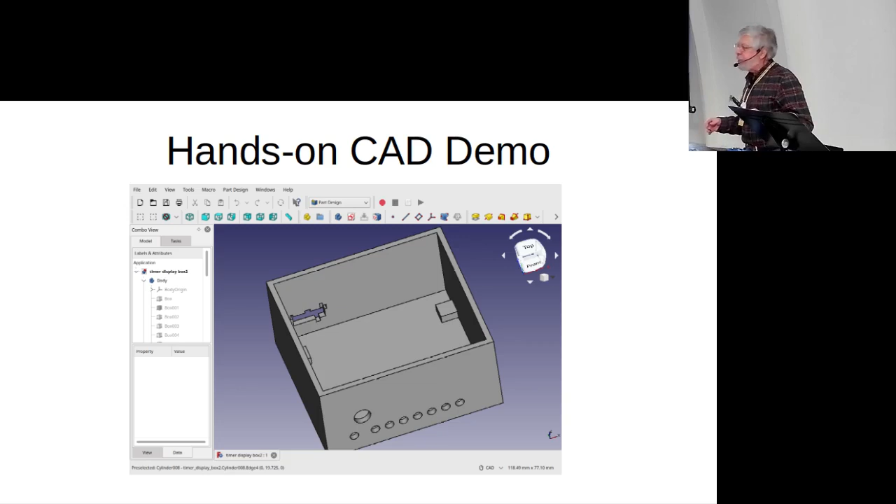So, hams build things, right? This is what we do. We build things. What I'm going to do tonight, live dangerously, I'm going to do a live demo. I'm going to cover a little bit of the history of what we've been doing, as this is normal stuff for us, look at maybe another way of doing stuff, and then actually go in and do it live.

Historically, who knows what an Altoids tin is? How many have built this stuff in an Altoids tin? Ammo box? How many have spent hours walking the aisles of Home Depot with pieces of PVC pipe on your fingers, trying to figure out which ones go where? We use copper pipe, we use PVC. PVC is the universal building material, right?

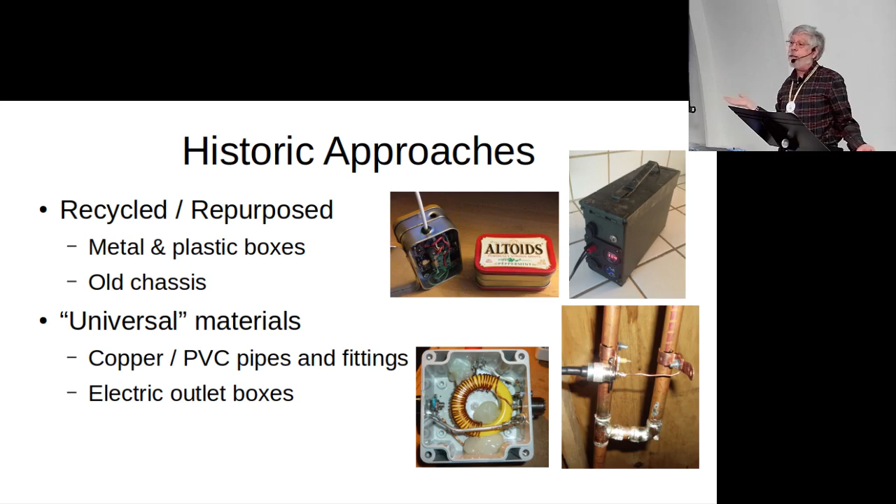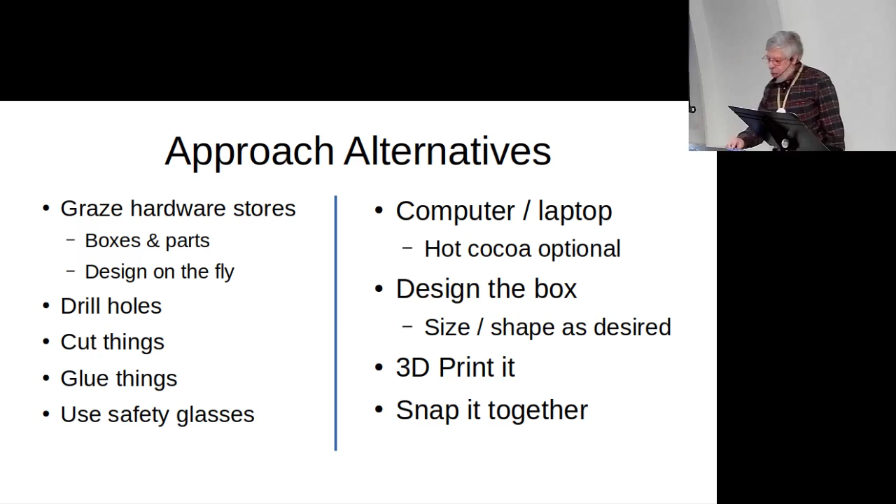Who would have known? But what happens when you have a project like this? What do you build? What do you find for a box for that? And we graze the aisles, we look for things. One approach, so this was Greg's...

What is this? Oh, offset attenuator. One approach is to design the circuit board to fit the box. The other approach is to build the box to fit the circuit board. So we're going to do that this time.

What I did, this was my presentation from about a year and a half ago, or a year ago. I did my solar system. It's got a Victron charge controller in it, but there's no display. And so I designed a display circuit, and I built a box for it.

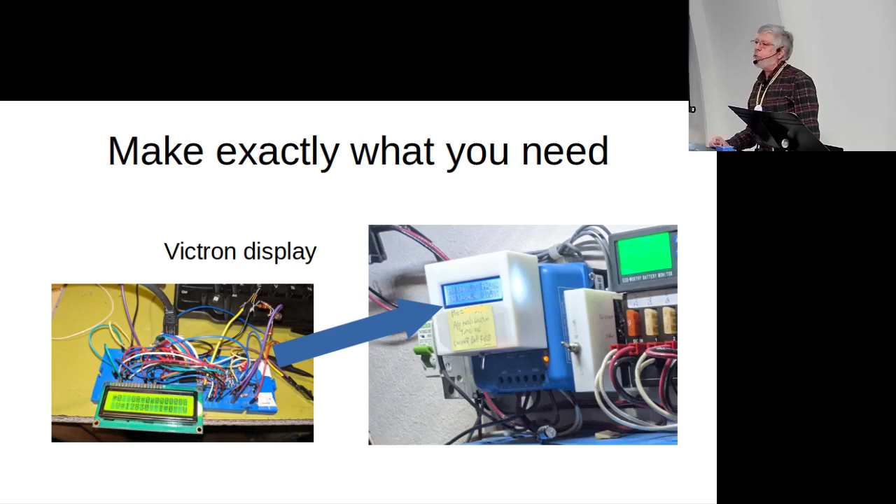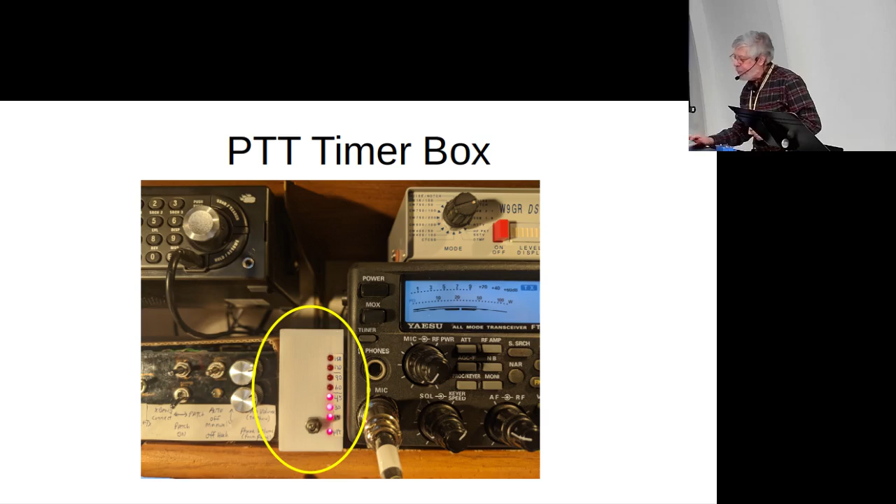You heard me on the coffee break net, I never time out on the repeater, and this is why. I have a little box with a little display. It increments up. When it gets to the top, I'm going to stop talking because I'm going to time out at 3 minutes. So what we're going to do tonight is I'm going to show you how to build that box, live.

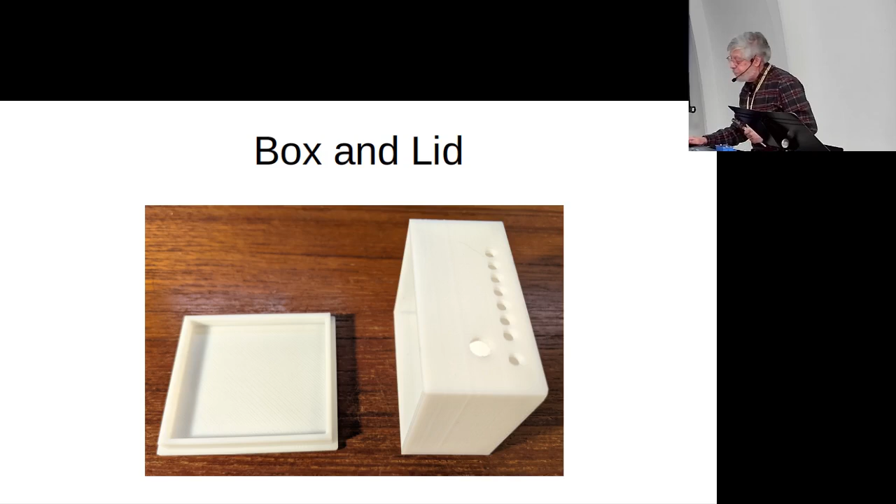There's the box and the lid. That was a test print. Inside: Arduino, some LEDs, stuff like that.

You basically have a box. There are little standoffs at the bottom for mounting the circuit board, holes for the LEDs. Stuff that you would sit there with a drill and safety glasses drilling holes in that thing from Home Depot, or you can have them pre-punched in the box that you print.

The lid snaps right on top. No screwing or soldering required.

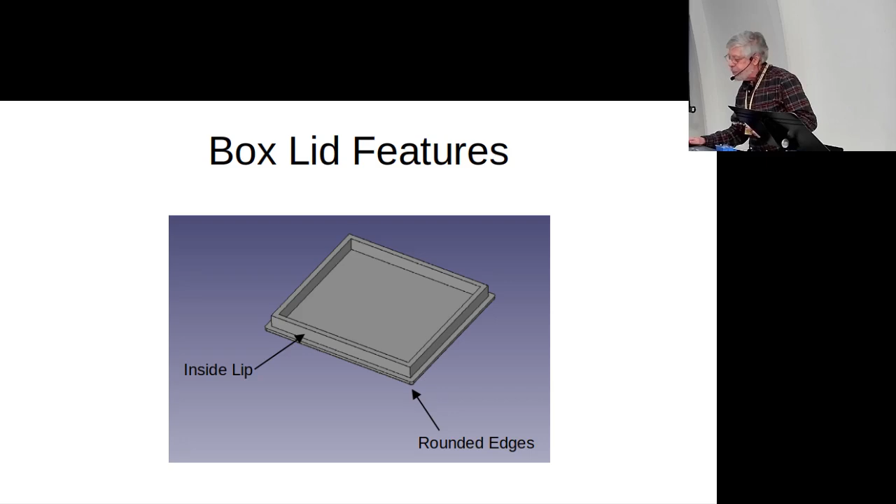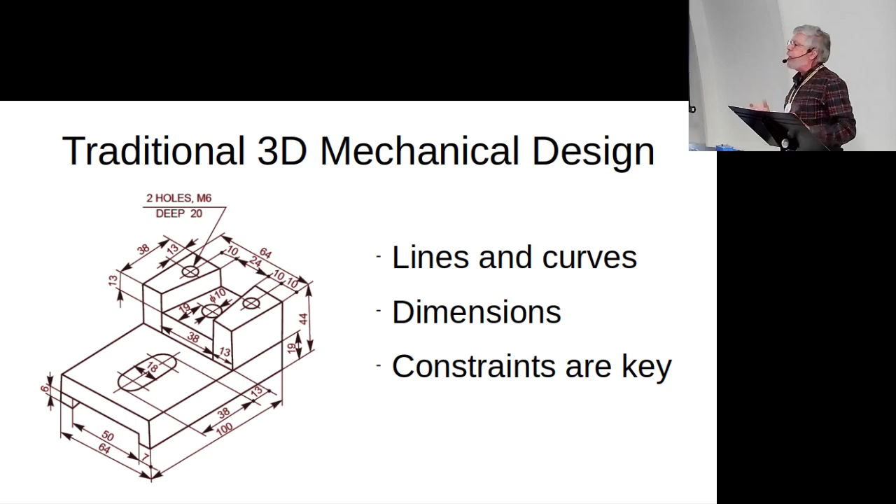3D mechanical drawing. Everybody has this image of 3D CAD, right? You see the picture of the jet engine and all the numbers and arrows and pieces, and they rotate it in 3 dimensions, you can see the thing spin. That's mechanical design. There's another way of doing mechanical design, which is very simple: you put in material and you put in negative material. It's called a hole.

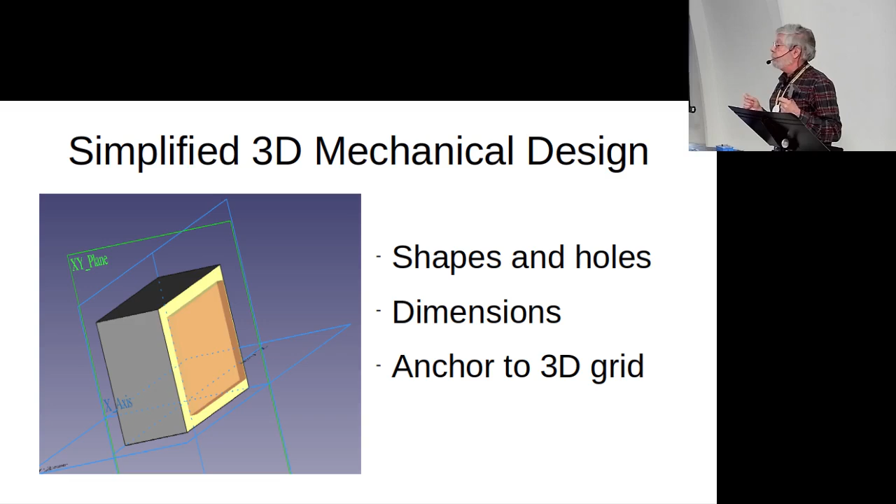And you stick them together and you just build it up from there. And that's what we're going to do tonight. So there's the hole being positioned, and there's the hole when it comes in there.

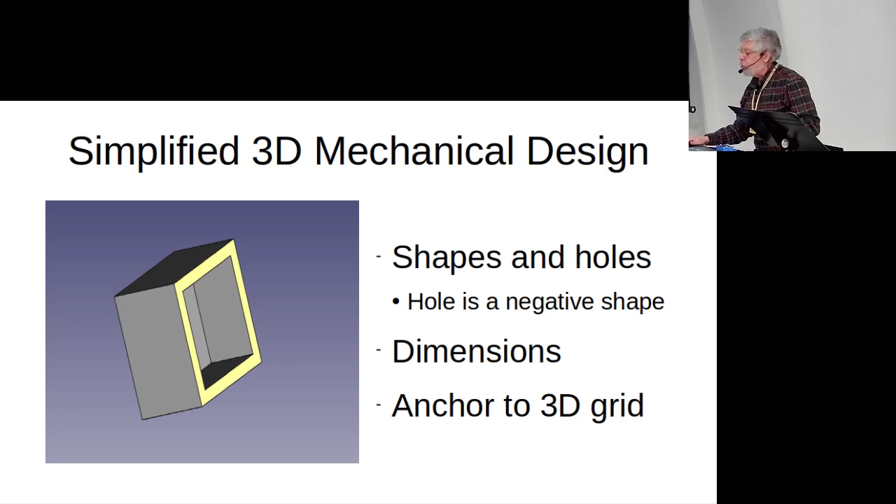All we need to do this is pencil and paper, one of these. This is a digital caliper, amazing device, and some free software.

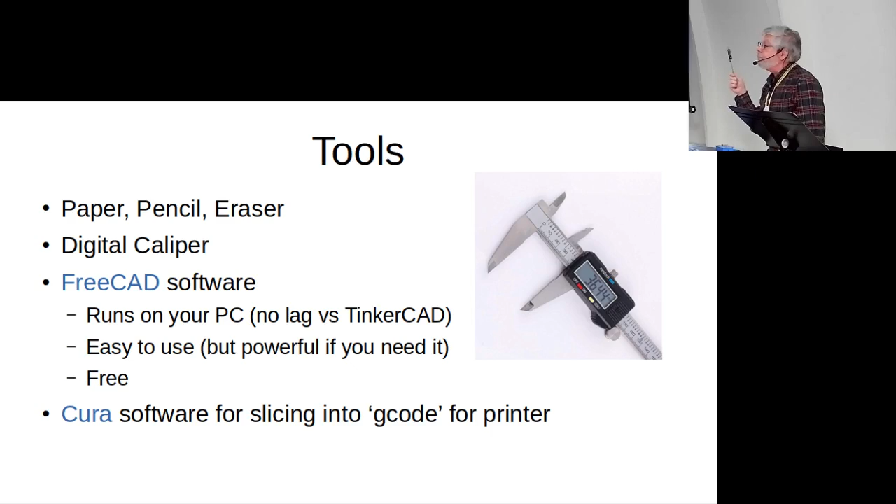First thing you've got to do, you've got to know what you're going to build. You don't sit down there and start designing things. I'm going to do it tonight, but we're going to make some mistakes. That's okay, you can see what's going on. You really need to understand what it is you're building, by dimensions.

So the box is going to be, we'll build a box at 100 by 50 by 50, or 100 by 100, a 4 inch by 4 inch by 2 inch high box. We want like 2 millimeters of width of the plastic around it.

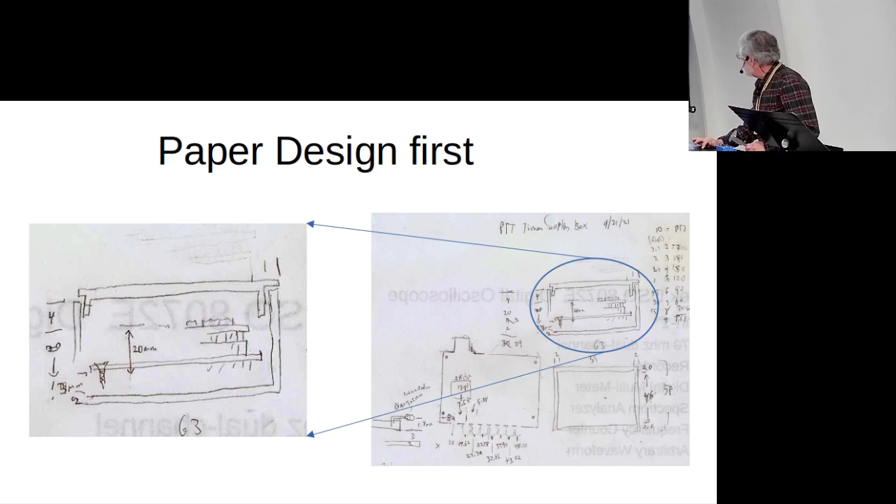And so then you start stacking these things up. You look at the... well, that's cute. There we go. So you've got your dimensions there where you have the base, 2 millimeters up is the start of this thing. You've got some distance you want to have between these. This thing is thick. You stack them all up, you add up all your numbers to figure out where things are physically. Pencil and paper and your digital caliper.

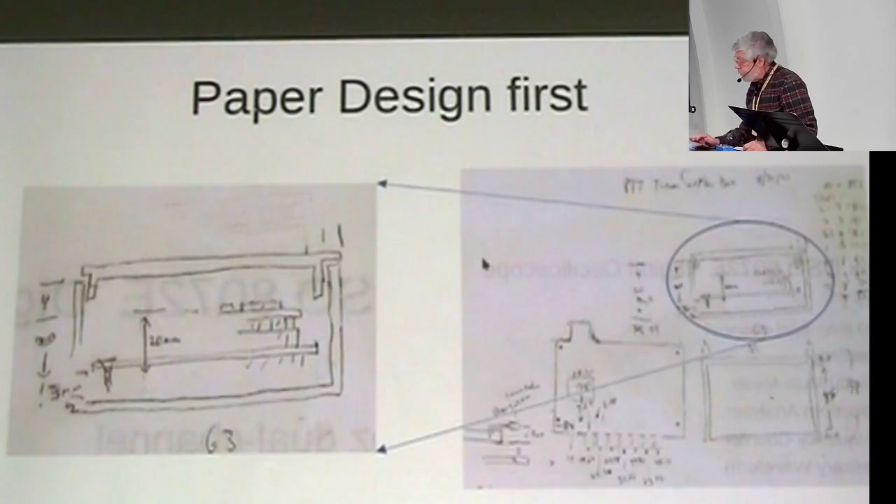And then, this is FreeCAD. FreeCAD is free. It's an open source computer-aided design. It's really powerful. It's got a bazillion different modes to it. You can do animations, you can do all kinds of stuff. You can do that jet engine if you want. We're not doing jet engines tonight.

There are tools across the top here. You've got parts of your component laid out here, and of course stuff is in the middle. The most important thing to start out with, you start with the start thing down here, go up here, go to part design. That gets you this set of tools.

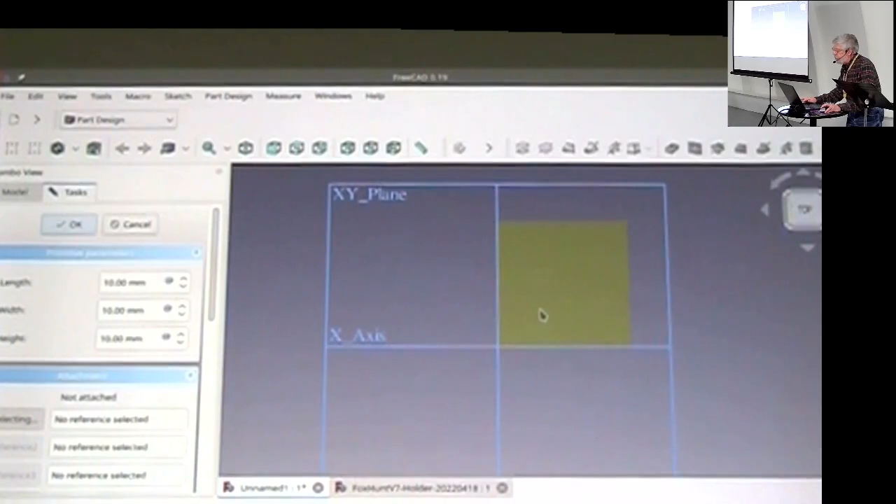You can click on the box. Now you have the navigation, shift and right click gets you this thing turning around here. And so there's the part, right? There's my cube. Now, we're going to make this thing 100

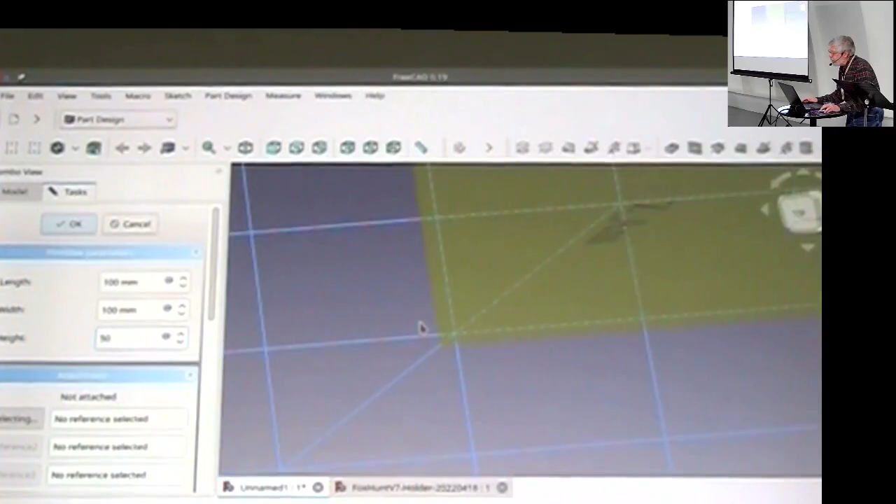by 100 by 50. Okay, scroll out. That didn't sound good. So there's our box. And if I shift and drag this thing around, you guys can see this? We got our box here, 50. And this is just a cube of plastic. Okay, you're not going to do much.

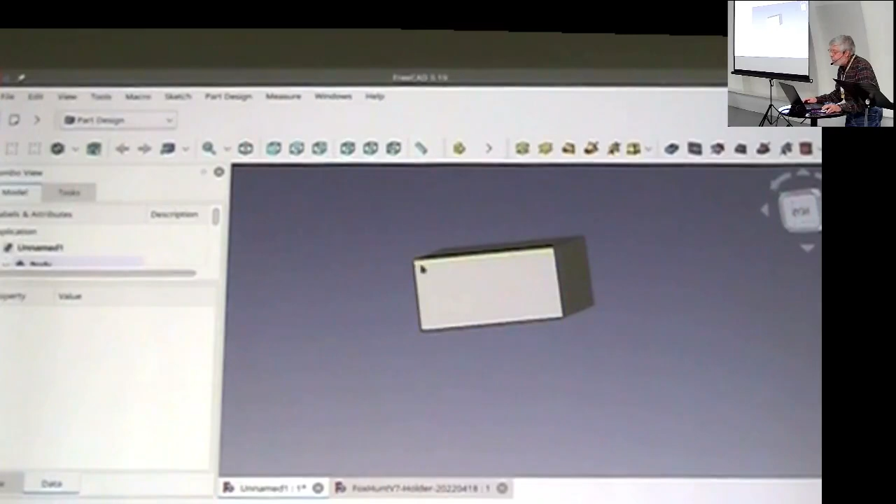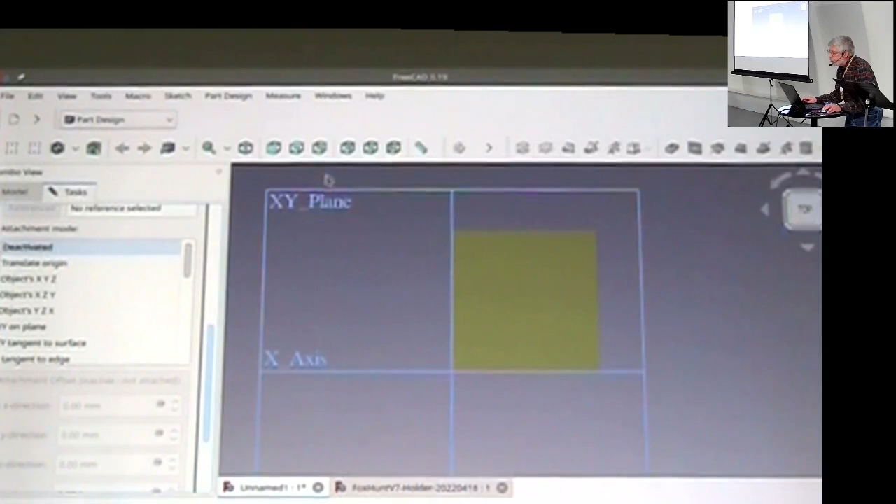Now, you can take your Dremel tool, I suppose, and route out the middle of it, but we're not going to do that. Oh, one thing I missed here is we need to have this thing anchored. Come on. I'm living dangerously here. Okay, I forgot, you got to anchor it to one of the coordinate systems, the XY plane in this case.

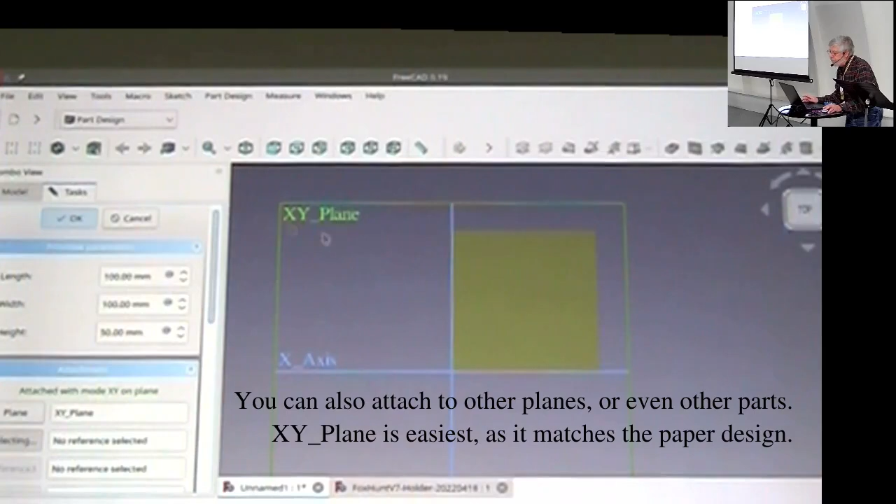Very important. Okay, now, there's our box. And now we say, so these are the additive things, you're adding plastic. These are the negative things. So let's take out a subtractive box.

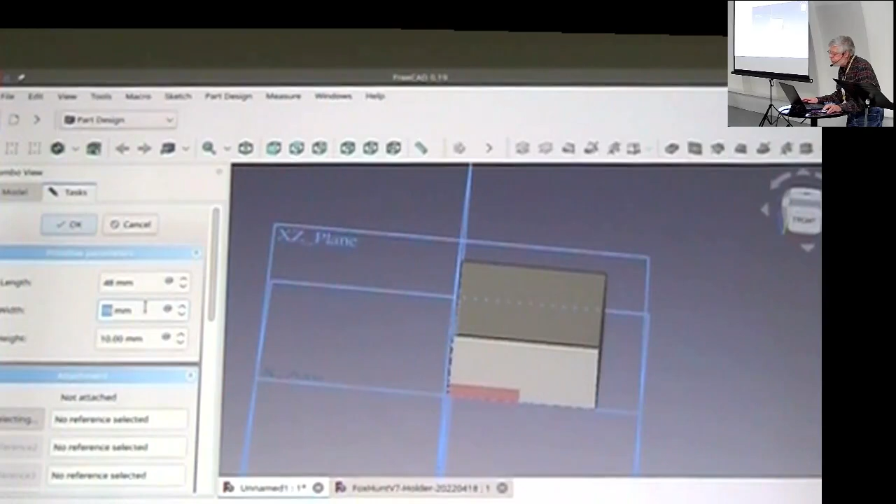And if we zoom in on this thing, you can see it down here in the corner. And as I take the length and make it bigger, okay? And the width, make it bigger, a little bit the other direction. Now, 100 by 100 is our size. We've got 2 millimeters on each side.

So how big is the hole in the middle? 96, right? 100 minus 2 minus 2. So let's make this 96. We'll make this 96. And then for the height, 2 millimeters off the bottom, and even with the top. So that one's going to be 48. That make sense?

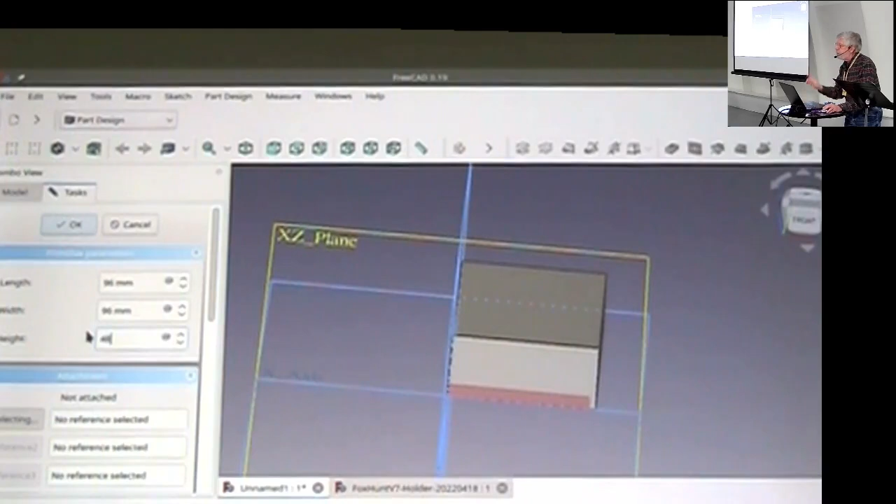And of course, we want to be on the XY plane. That's not the XY plane. Where's the XY plane? Go to there, there's the XY plane.

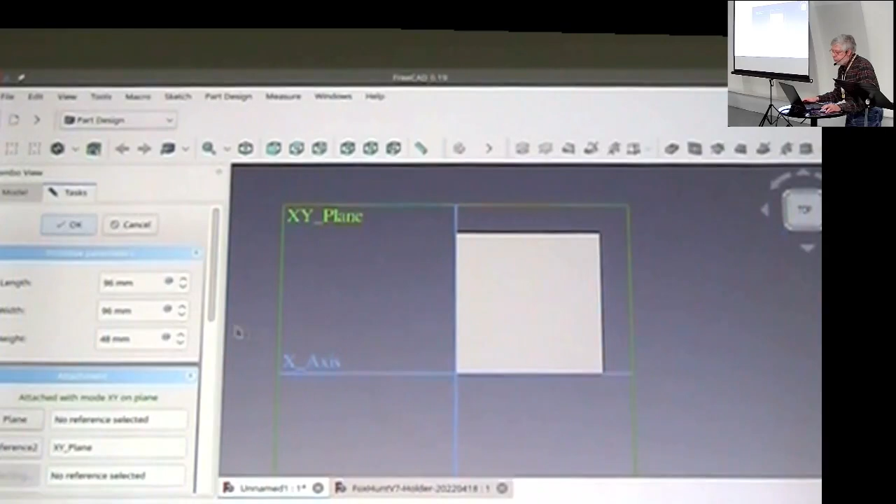Okay. So now, we can go down to this part, and if I look at this thing, it's hard to see here, but zoom in, you can see it's kind of off, there's the hole there. We want to move this thing around 2 millimeters to the side, 2 millimeters that side, and 2 millimeters up.

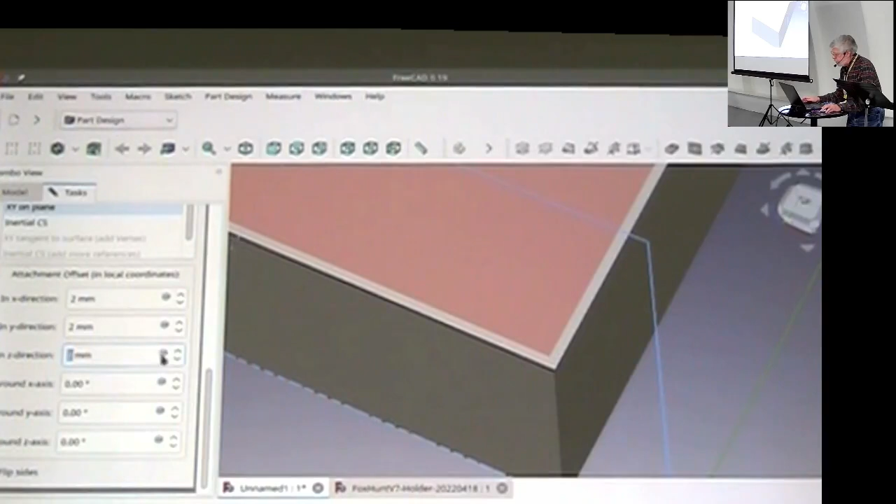And now, if I say okay, guess what? We got ourselves a box. That's all it took. Okay, I can export this thing, print it out, done.

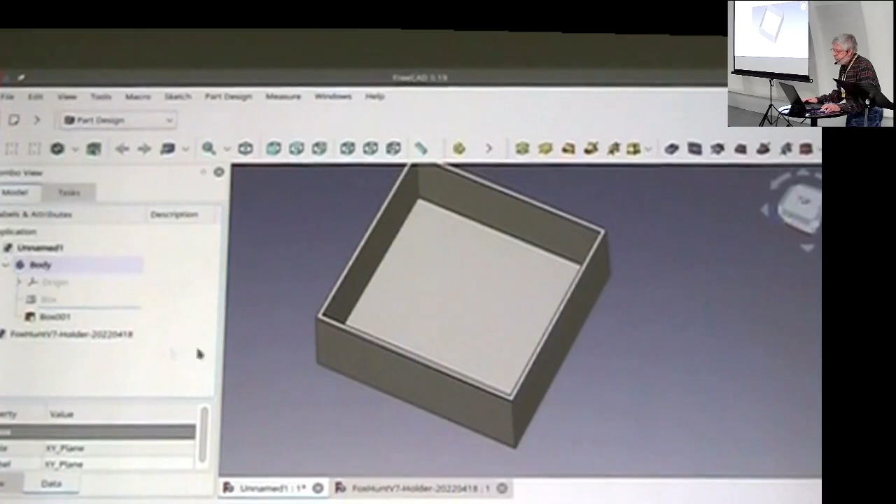Oh, got a lid. We'll make a lid. Let's make some holes in it. So we have our box. This is looking straight down.

Let's make a subtractive cylinder. Okay, there's our cylinder. Now, it's on the XY plane. There's an easier way, but I won't cover that right now. And there's our, so we just drilled a hole down in the middle.

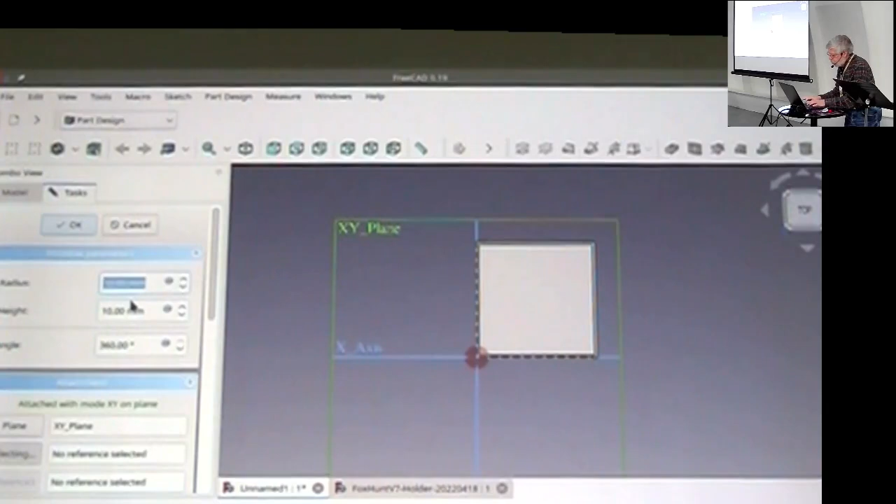We need this thing, let's see, the LED is about 3 millimeters diameter, roughly. So the radius is 1.5. It's going to be 2 millimeters tall because that's how thick the side is. And it's going to be a full circle, a 360.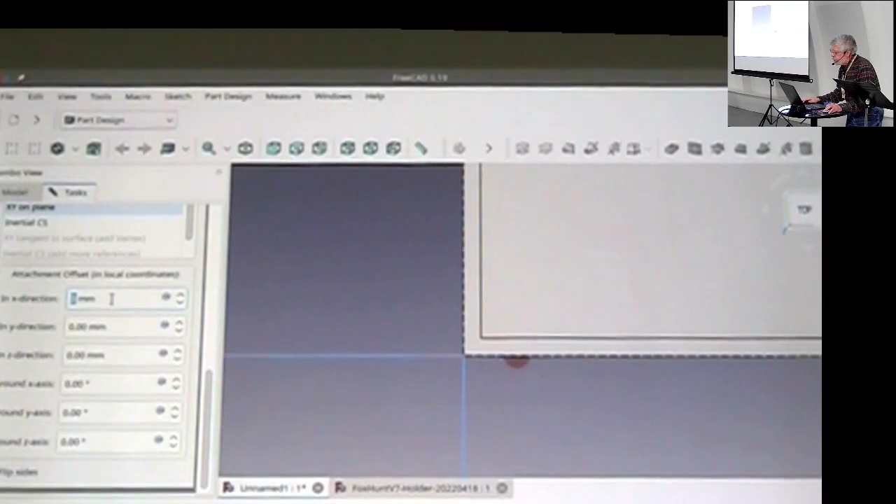Now, if we zoom in here on a little cylinder, we're in the wrong direction and wrong place. We move it across, and we'll move it up. Now let's move it. So here's our hole. Now that's on the bottom.

We need to have this thing be rotated. One of these things is going to be rotation in the right direction. Can you see it turning? You see that thing turning there? Let's zoom in a little bit here as I'm doing this. See, I'm rotating it.

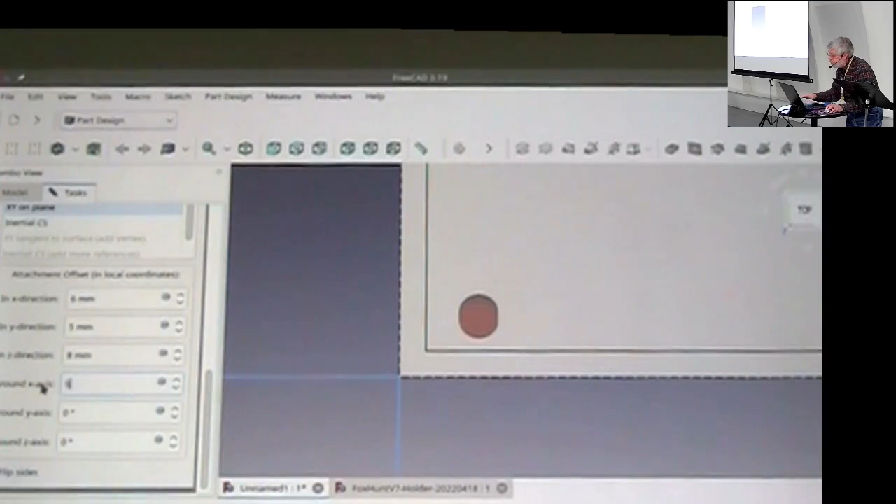We don't want it that direction. We want this thing to be 0. We want it to be... like I said, we're doing this live here, guys. Okay, here we go. So this is going to be 90 degrees. And now it's this little circle in the middle of space.

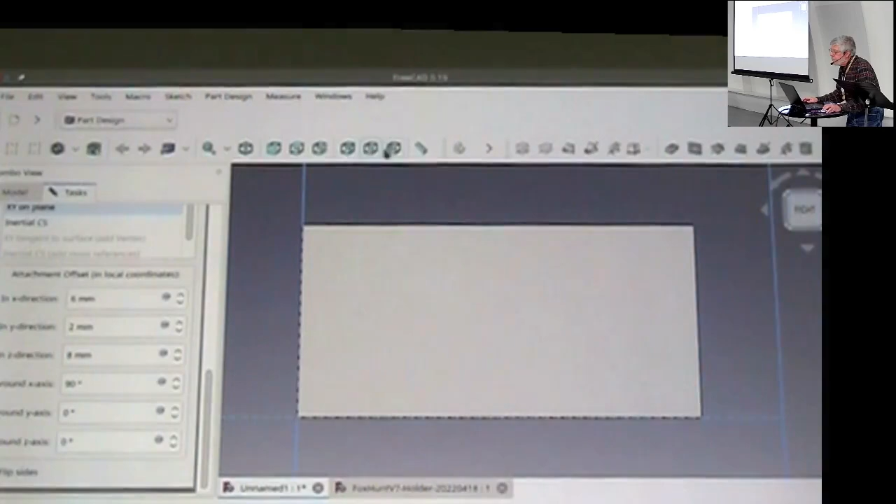So let's move this thing down there. And if we look at the thing on the side, one of these sides, there it is. We got a hole. And you keep on doing that, and you get all the LEDs across the bottom.

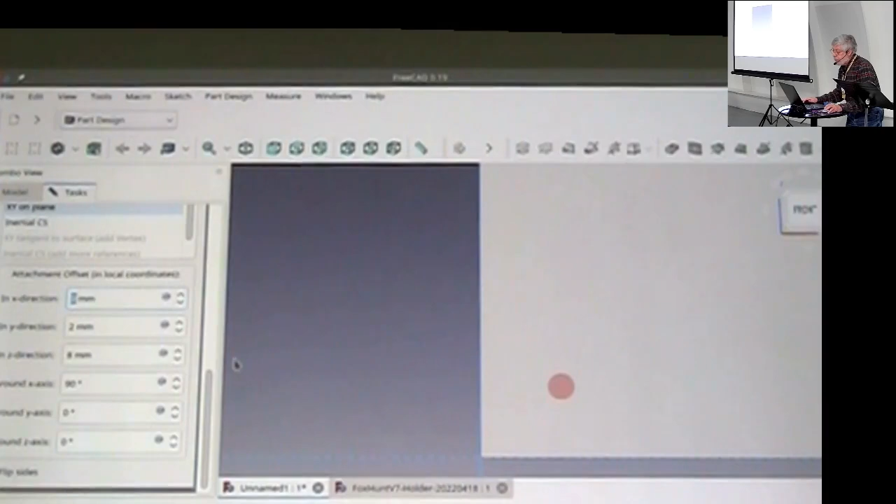Let's move it over sideways, right there. Make sense? Okay.

Now if we shift, see the hole there? Little hole inside the box. That work? Okay.

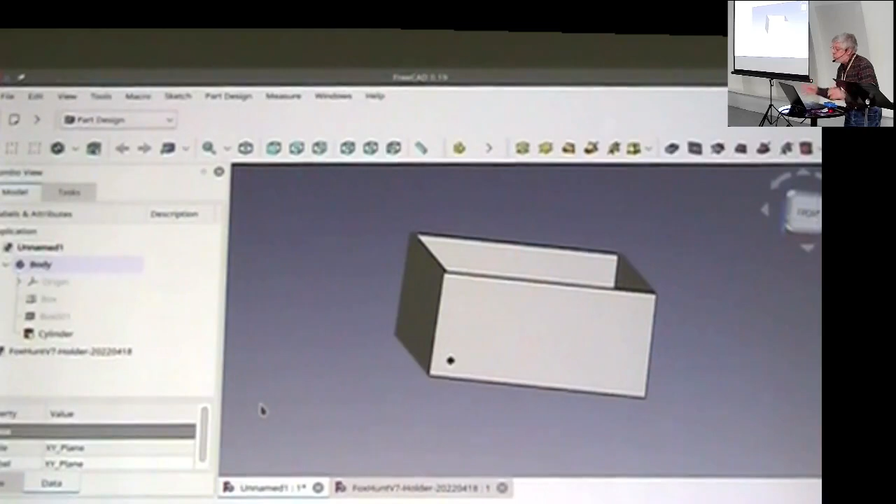You put all your holes in. Oh, we need supports for the PC board.

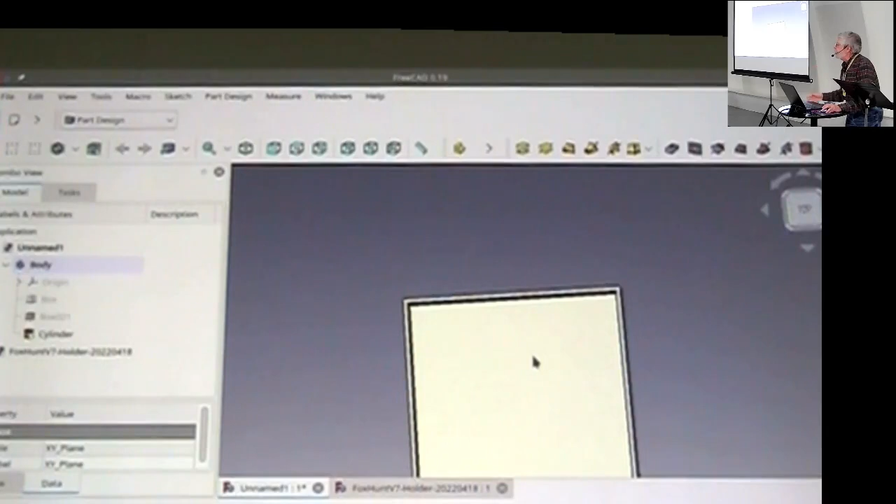You can replicate, I've done that. It's a question about replication. You can replicate and then reposition it. Sometimes it's easier just to put a new one in there because the parameters are going to be different for each - the location will be different for each of them. It's going to be 1.5 and a couple of the base things. Sometimes it's easier just to put it in each time.

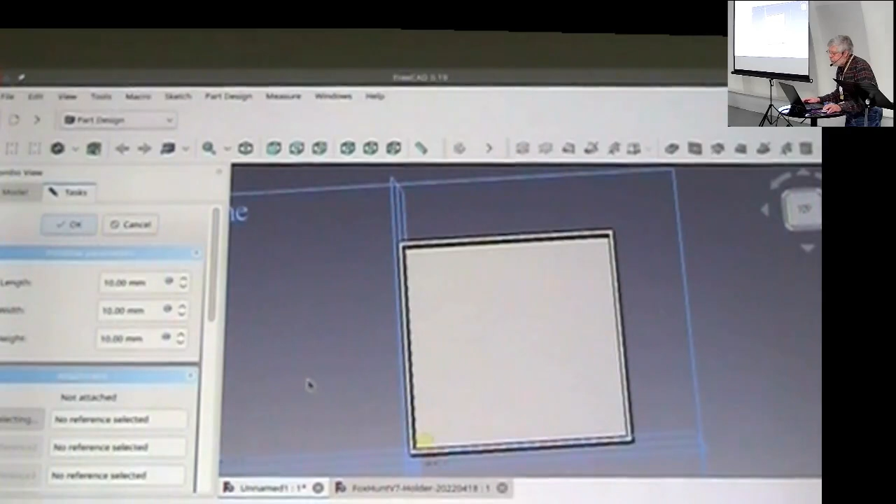We need some supports, so a little box down there. That's actually not a bad place to put it. XY plane, and just to be easy, we'll do that.

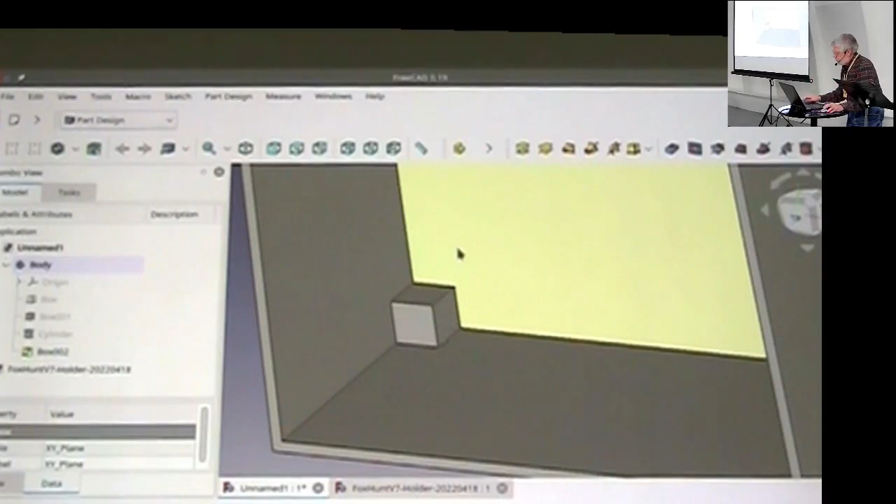So now if we look at this thing here, see a little support in the corner? So we'll have 4 of those. There's one, we can do another one here.

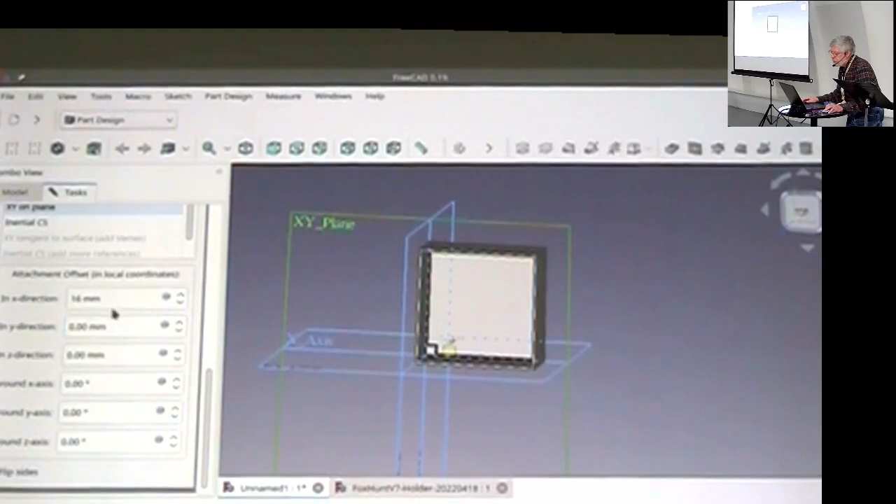And again, the XY plane. Here we go. And let's move the X direction of this guy. See him moving across there on the bottom? Move him to the other side here.

And so now we've got a second one. You get the idea. We put all 4 in there.

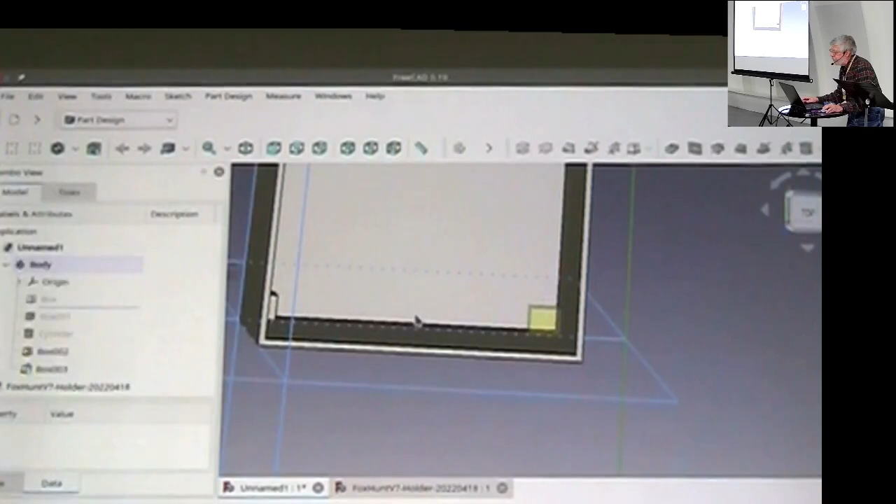One of the things I found in one of my boxes that I did is when you're going to insert these boards in, if you got things sticking through the holes, make sure the box is big enough that you can put it down and slide it into place. Otherwise you can't get it in. That's why I have a second one over there.

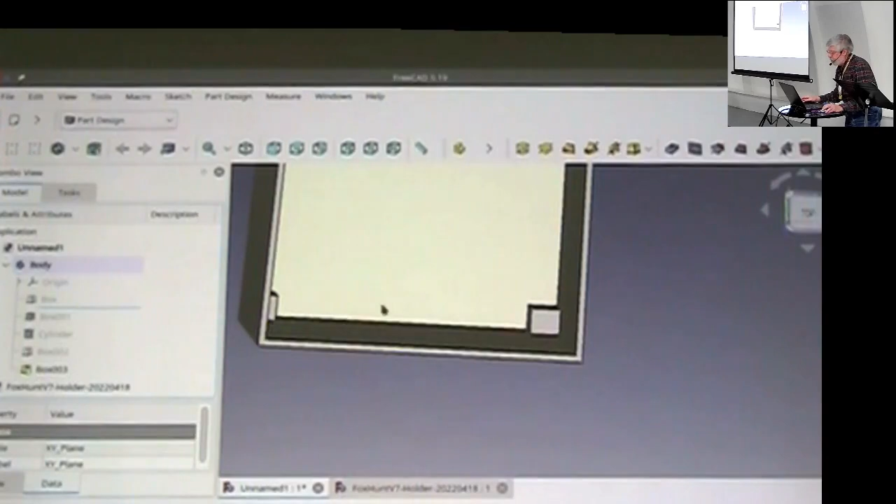Missed that. Okay, make a lid. We do a new one. A lid is, well, a lid's a big flat thing, right?

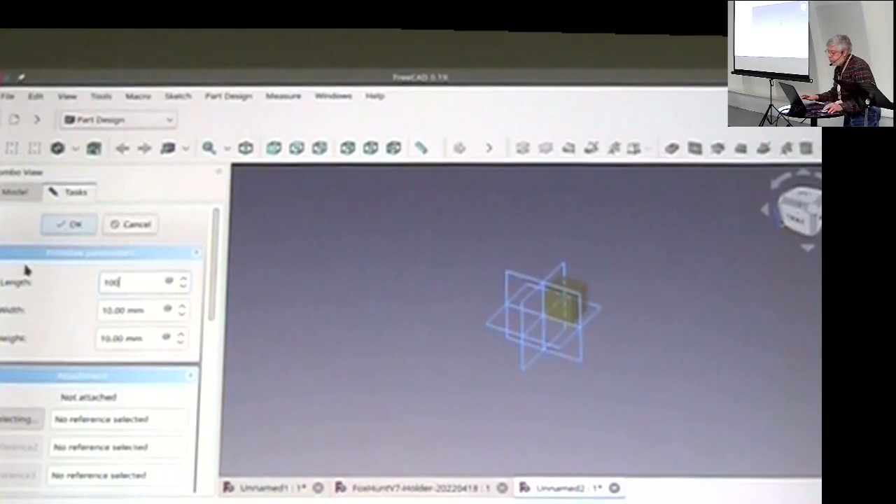Guess what? A lid is just 100 by 100 by 2, right?

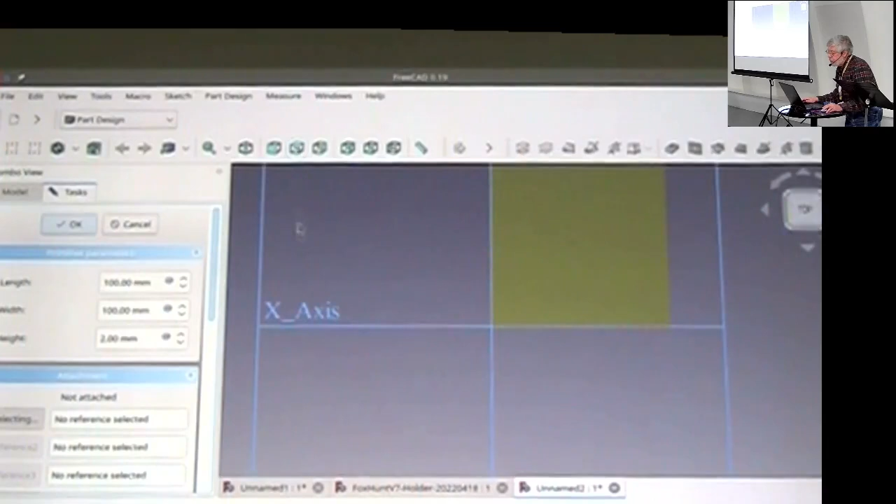So I have that on XY plane. I don't have the XY plane. XY plane, gotta have the XY plane. Wish it would default to that. Okay, so that is our lid.

But unless you want to glue it on top, which you could do, you want to have a ring around the inside, a little lip. So that's another box.

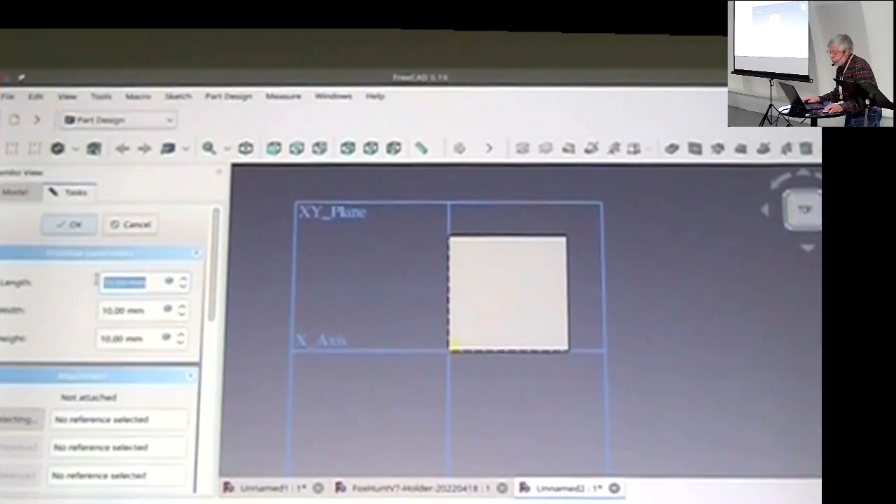And it's 100 - no, it's not 100. It's going to be, what's the inside dimension? 96. By 96 by - so 4 millimeters is probably enough for the lip.

Now notice I have the same dimensions on the outside of the lip as the inside of the box. There's no gap there, that's for a nice tight fit. I was worried about how much slop I needed - the answer is 0. It just works out that way.

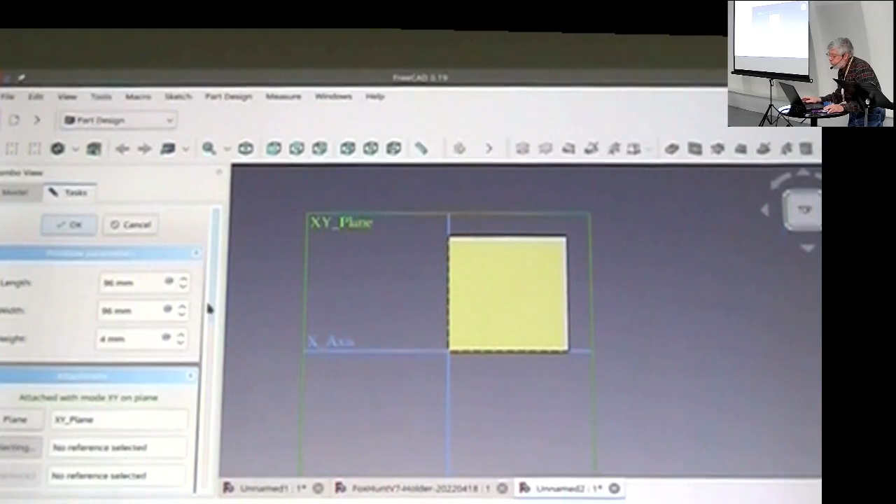We want to be on the XY plane again, and now we've got to move it over a little bit. X direction, 2 millimeters. Y direction, 2 millimeters. And we've got to be up 2 millimeters to have it on top. So now we've got, basically, it looks like a little mesa there. That's a lot of plastic.

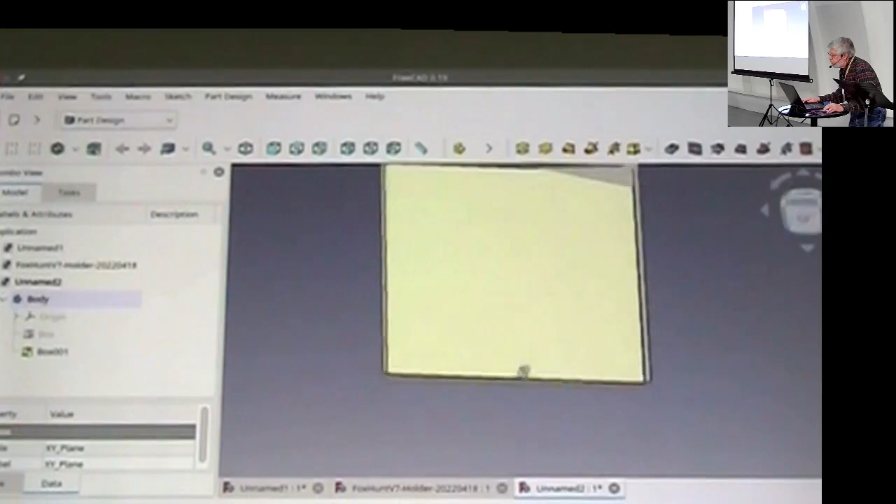So we got the lip there. That works. But what you can do is do a subtractive box on top, which is going to be XY plane.

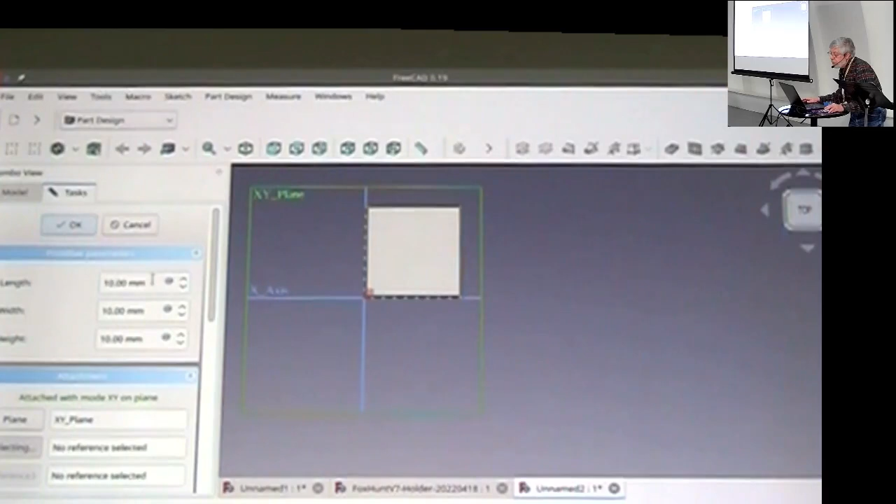So another 2 millimeters in. That was 96 was the outside, 94, 92 for the inside of this one. 92 by 92 by 4.

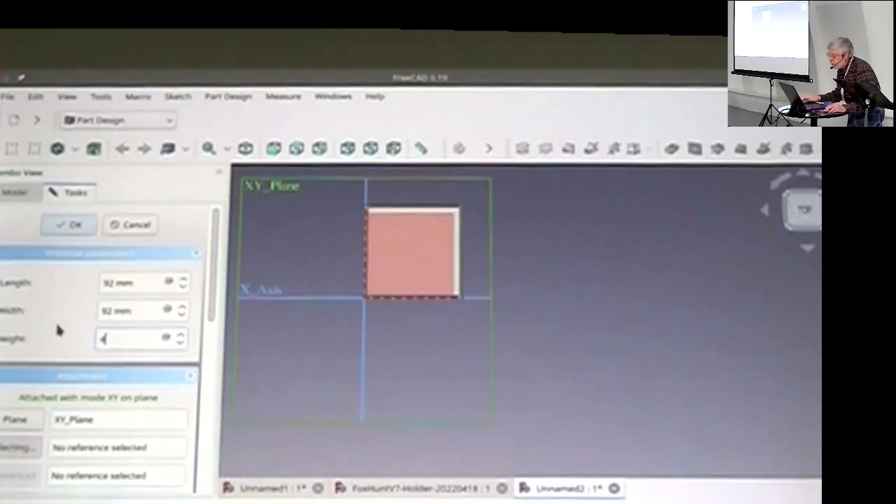And move it up, so it's got to be centered by 4, and 2 millimeters up from the bottom makes it flat with the surface. That should be a lip.

Let's zoom in here a little bit. There we go. Okay, got a lip there on the outside.

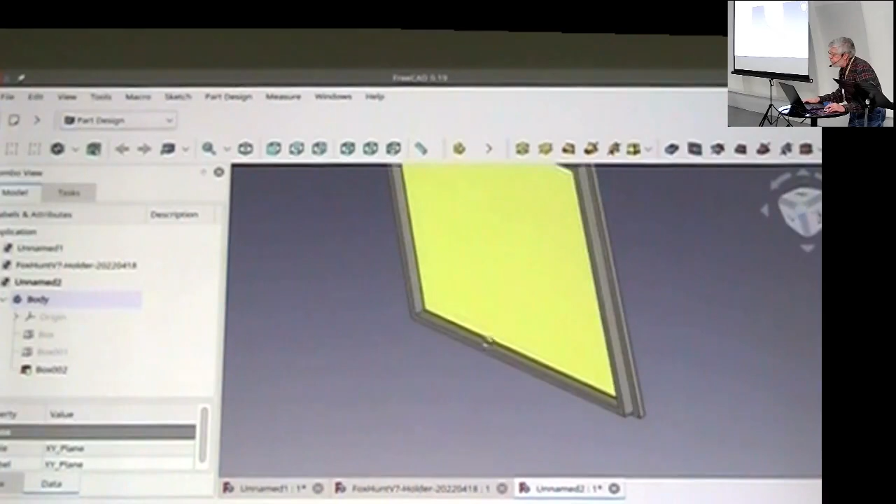Good. And then if we want to get fancy - I mean, we don't want to cut ourselves on the corners here, right? So we can click on that edge and put a little - let's see, where's the - somewhere in here, there's going to be, we've got a chamfered edge, rounded edge. So that'll round off that edge. Oops, click OK.

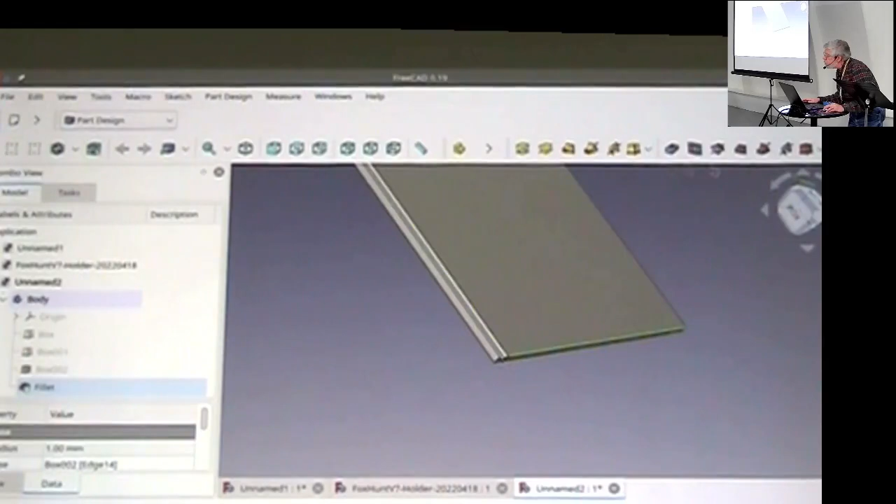So we'll round off this edge here, just highlight the edge. It really helps having a larger screen - normally I'm running at 1920 by 1080.

Okay, so zooming in, you can see what we've got here - nice rounded corners. You can do that all the way around on the other edges, just to make things nice and neat. And that's it.

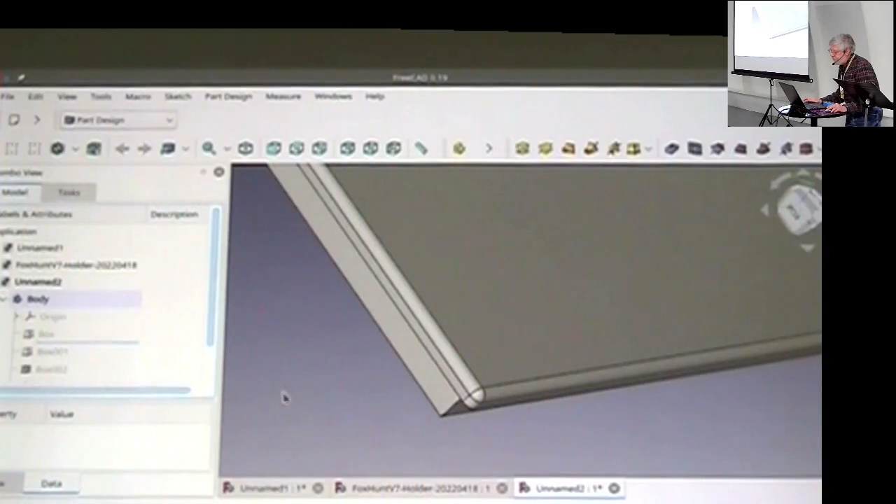We now have a lid, we have a box designed. We take the box, the body, file, export, and let's go up one.

Nope, didn't want to do that. Oh well. We'll just overwrite.

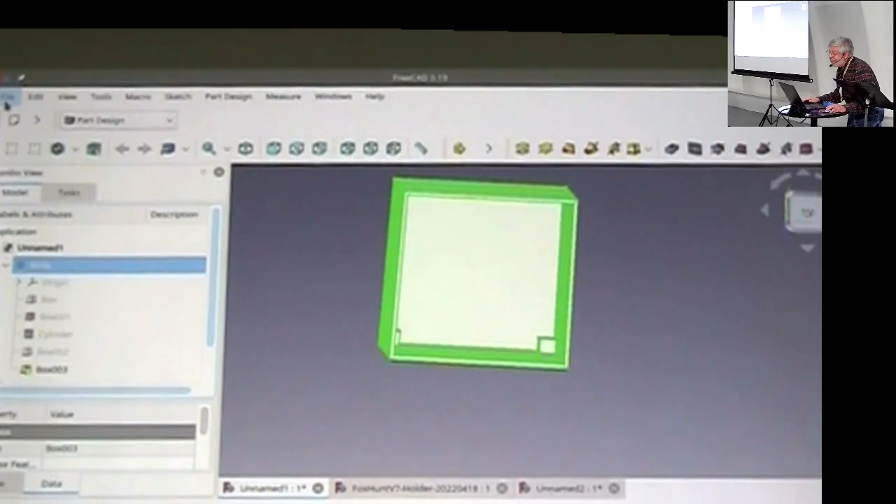Yeah, well, this is a copy. Everything here is a copy. Okay, anyway, I just want to know what I exported so I can - that's with the tabs. Okay, good. That's fine.

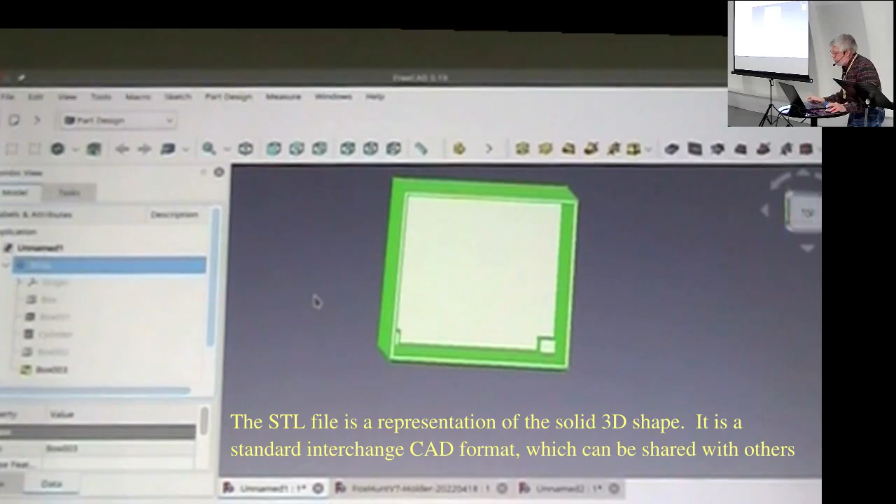So that's an STL file - that's the CAD drawing as a 3D model, now in a form that we exported, and we import it into a program called Cura. Open this up, and it was this one here. Okay, there's our box. What you can do here is basically lay out how you're going to have it actually printed.

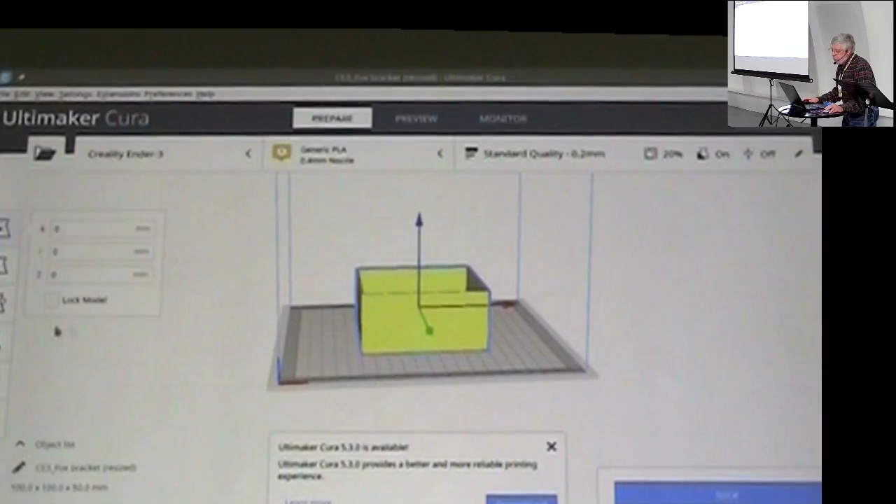It defaults to the XY face sitting flat down, which is why the XY plane was so important. You can flip it if you want, or if you want to print it at some angle, you can move it around. But at this point, just the default's good.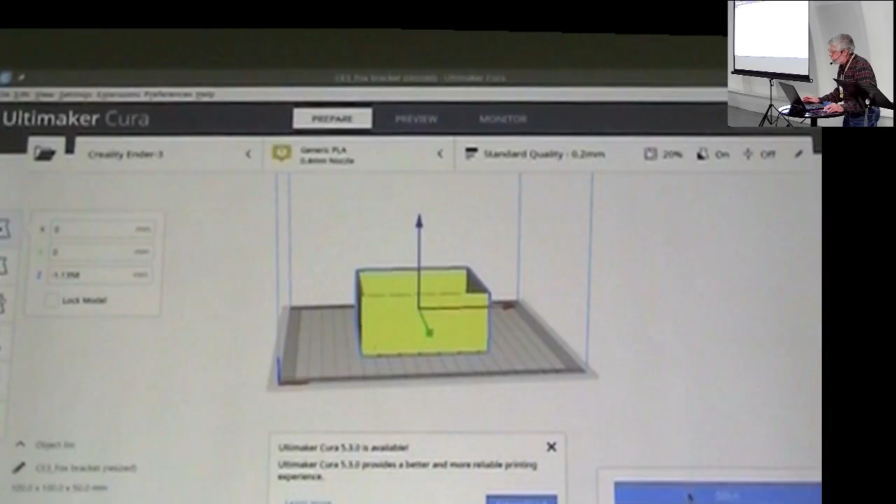Hit the slice button, and it goes through and comes up with a file called G-code, which is the machine language for the printer. You put that on an SD card, stick it in the printer, and off you go. It starts printing.

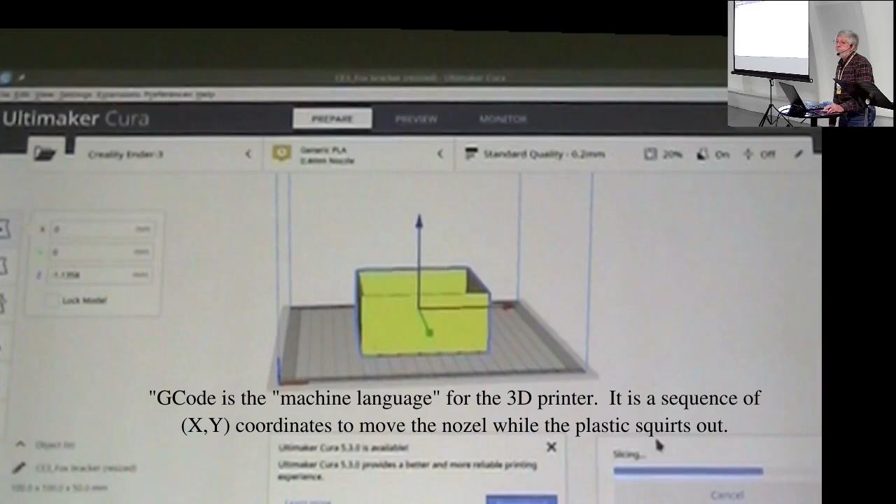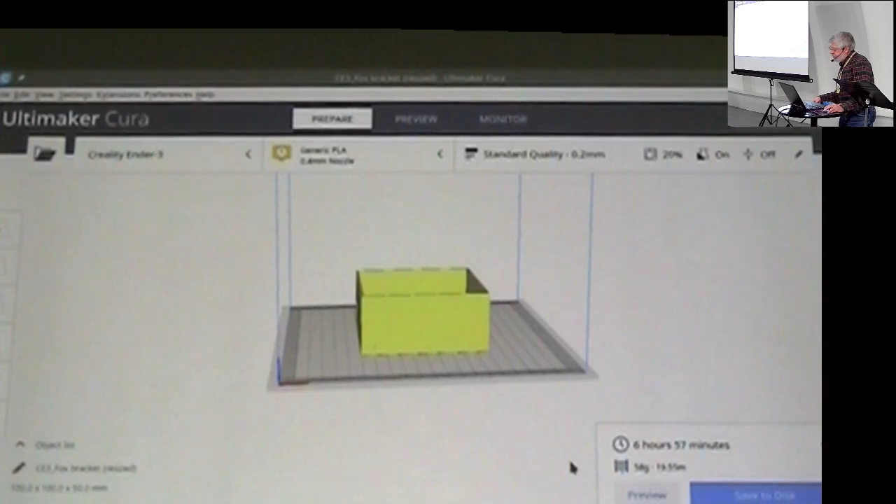Usually slicing takes less time, but this laptop is not great. Still faster than printing, and it's faster than walking the aisles of Home Depot, right? Also the time it takes getting the drills and safety glasses and everything else. Now it says 6 hours and 57 minutes. I don't believe that's going to be how long it takes to print, but maybe.

It'll take a while. Anyway, that's kind of the demo. So if you want to build a box - there's a box, and it's got air holes on one side, a little fan grill on the top, things on the side here, stuff inside, little mounting holes. Box. Took me a morning to design this thing, took me all day to print it, but there it is - it's the exact proper size for what I needed.